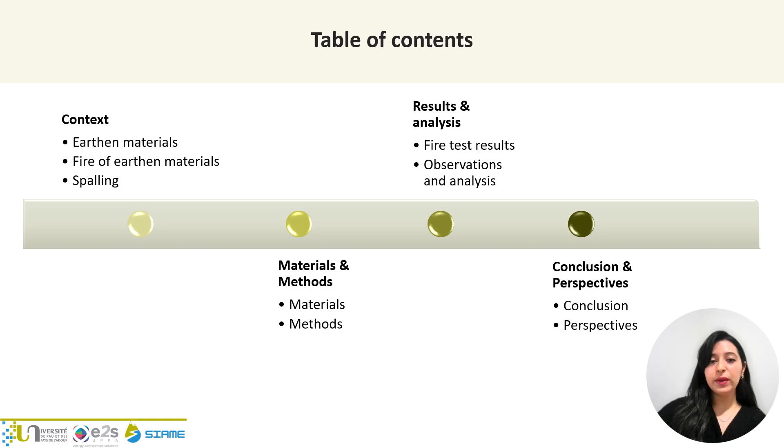In today's presentation, I will begin by setting the research context. After that, I will move on to the materials and methods. Following this, I will present the results and analysis. Finally, I will conclude. Beginning with the research context.

Historically, earthen materials have been used for thousands of years and their durability is impressive. Many historic earthen buildings have survived for centuries. Today, around 8 to 10% of the world's population still lives in earthen houses. As we all know, the construction sector is a major contributor to global CO2 emissions. Earthen materials here offer a highly sustainable solution as they require little energy for production, are recyclable, locally available, and serve as an eco-friendly alternative to fired bricks and conventional concrete. Their application is also highly adaptable, as almost any clay-containing soil can be used for construction. Earthen walls provide excellent thermal regulation due to their high thermal mass and inertia.

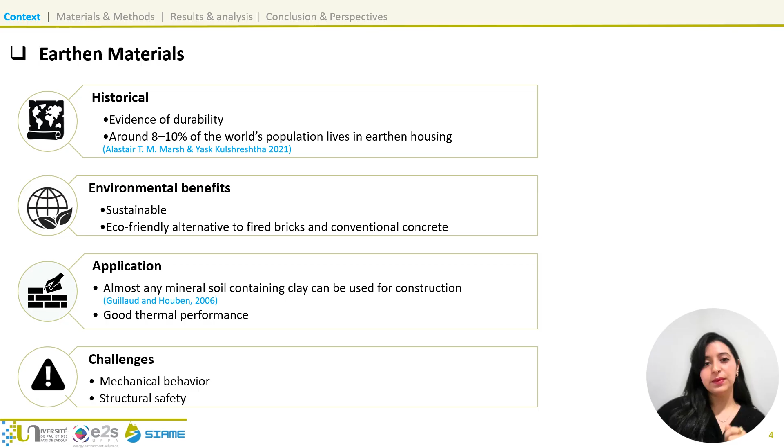Yet, challenges remain. Their mechanical strength is lower than cement-based materials, and the structural safety of load-bearing walls under fire is still poorly understood. Understanding this interaction between fire exposure and mechanical loading is exactly the focus of our study. Despite their advantages, earthen materials face a significant knowledge gap regarding fire behavior. There are currently no established standards and studies remain scarce. In real-life conditions, walls are often subjected to loads during a fire, making it essential to analyze the performance of compressed earth bricks under combined mechanical stress and high temperature to ensure safe, sustainable construction and guide future building design.

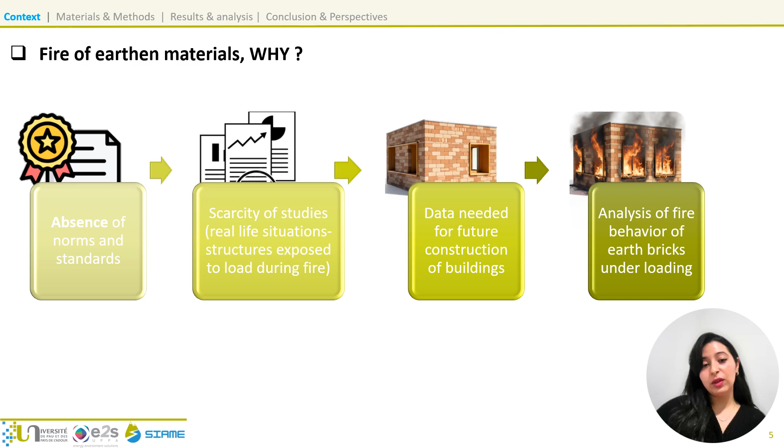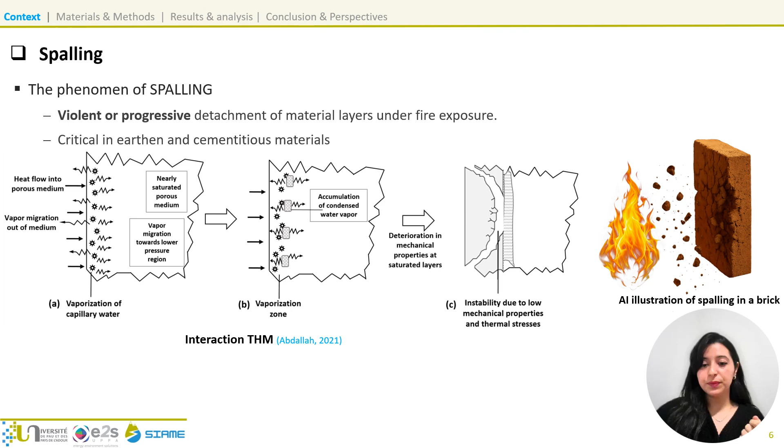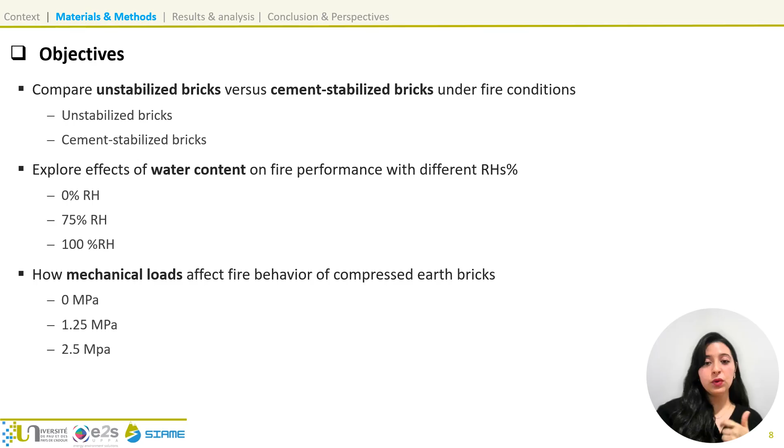Having set the context, I will now present the materials and methods used in this study. Before diving into the methodology, I would like to present the main objectives of this study. The first one is to compare the behavior of unstabilized compressed earth bricks with cement-stabilized bricks under fire conditions. The second one is to explore the effect of water content on fire performance. For this purpose, bricks were conditioned at different relative humidity levels: 0%, 75%, and 100%. Finally, we aim to investigate how mechanical loads affect the fire behavior of compressed earth bricks. Tests were conducted under three levels of applied stress: 0, 1.25, and 2.5 megapascals.

The raw materials used in this study are as follows. The soil was obtained from the Nagen brickwork factory in Toulouse, France, and it was characterized using standard Proctor compaction tests, and the optimum water content and optimum dry density are summarized in this table. For stabilization, a CEM III/A 52.5 L cement containing 35% clinker was supplied by EQIOM in Héming, France. The materials produced were designed to have a compressive strength of approximately 5 megapascals, comparable to hollow-fired bricks used in buildings.

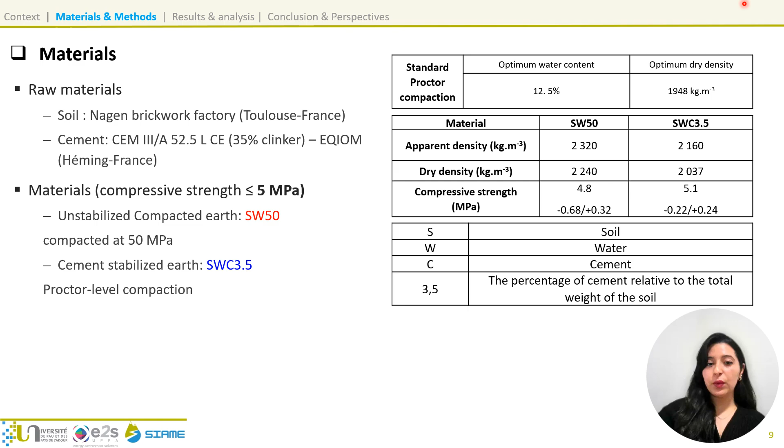Two main types of brick were investigated in this study. The first one is the unstabilized compacted earth brick, referred to as SW50, produced under a compaction pressure of 50 megapascals. The second one is the cement-stabilized earth brick, referred to as SWC 3.5, compacted at Proctor energy level with 3.5% cement relative to the total weight of the soil. In this table, we have an overview of the two brick types highlighting their apparent and dry density, and also their compressive strength in megapascals. The other table provides the legend explaining the abbreviations used: S for soil, W for water, and C for cement.

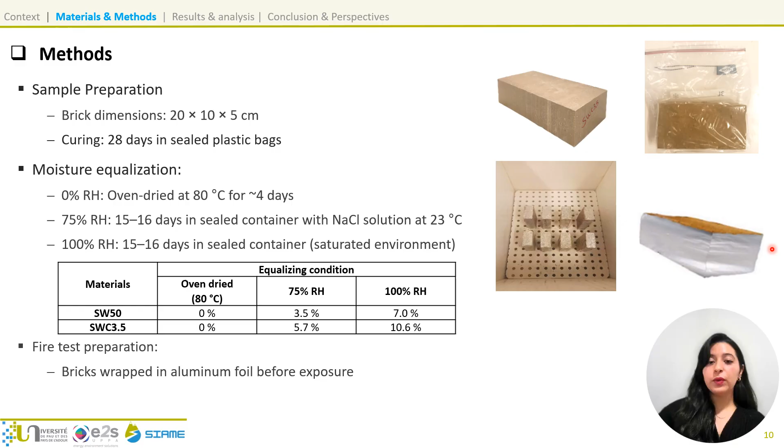Our samples were manufactured as bricks of 20 by 10 by 5 centimeters and cured for 28 days in sealed plastic bags. Moisture equalization was then performed under controlled conditions: 0% relative humidity by oven drying at 80 degrees Celsius for 4 days, 75% relative humidity in sealed containers with a sodium chloride solution at 23 degrees Celsius, and 100% relative humidity in saturated conditions, both for 15 to 16 days. The corresponding water contents for each condition are summarized in this table. As expected, higher relative humidity leads to higher water content, and cement-stabilized bricks retain more water compared to unstabilized ones. Before the fire test, all bricks were wrapped in aluminum foil to ensure uniaxial heat and moisture transfer.

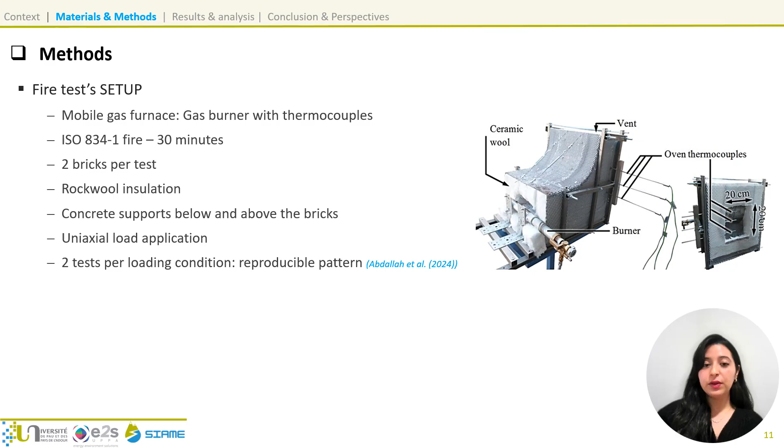Each test involved two bricks placed between concrete supports with rock wool insulation on the sides to reproduce uniaxial heat and water transfer, similar to what happens in real walls. A uniaxial load was applied during heating to simulate structural conditions.

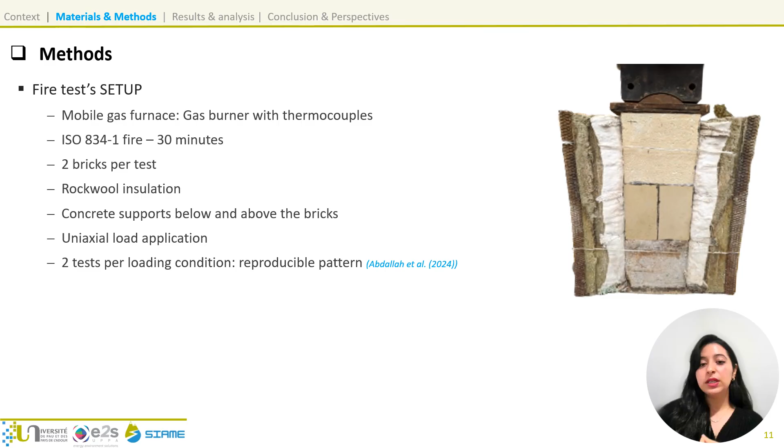As demonstrated by Abdallah 2024, two tests give a reproducible pattern, which is why we performed two tests per loading condition. And here we have a video of when the test was performed. Here we can clearly see the fire from the gas burner.

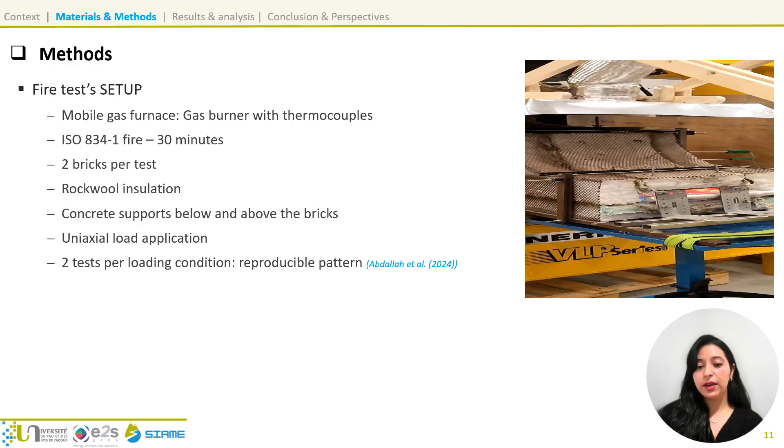What clearly emerges from this result is that the 75% relative humidity condition is the most unfavorable one, as it's the only case where instabilities occurred. By contrast, under both 0% and 100% relative humidity, the two types of brick showed consistent resistance across all loading levels.

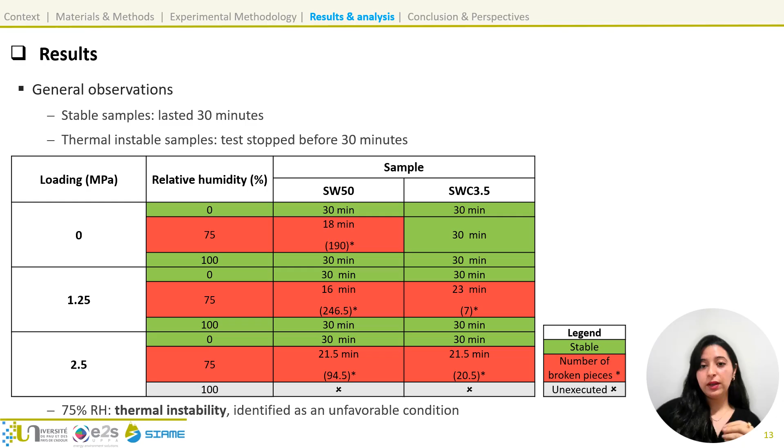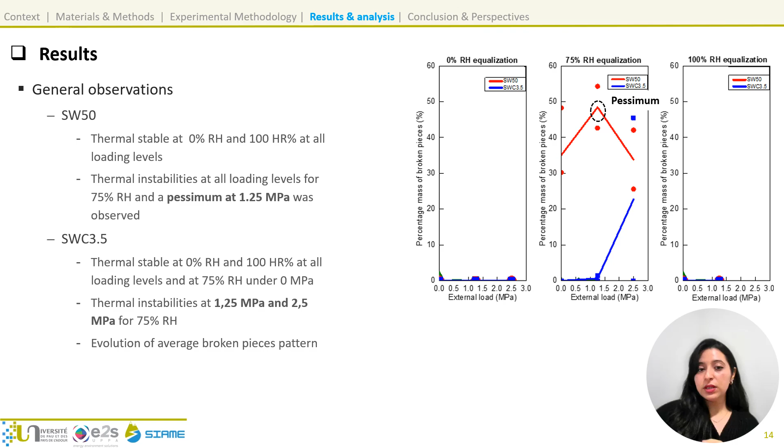For SWC 3.5, the cement-stabilized brick, stability was maintained at 0 and 100% relative humidity for all loads, and also at 75% relative humidity under zero load. However, at higher loads, 1.25 and 2.5 megapascals, instabilities were observed.

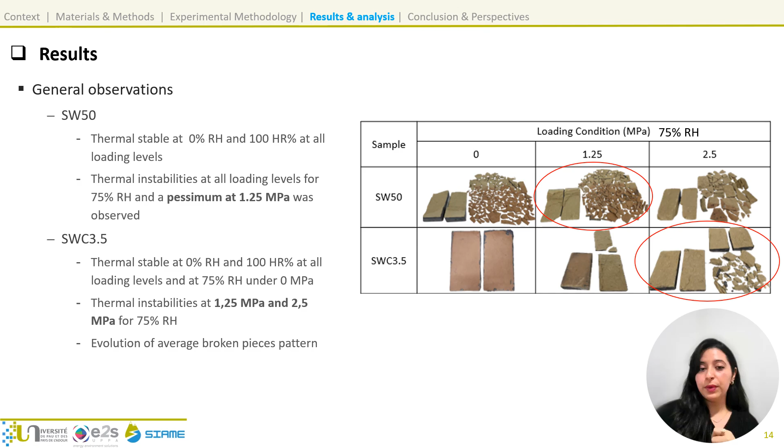As shown in this photo, at 75% relative humidity, spalling is much more severe in SW50 than in SWC 3.5. Moreover, for SW50, fragmentation is higher at 1.25 megapascals than at 2.5 megapascals, which is the maximum effect. Whereas for SWC 3.5, the opposite trend occurs, with more broken pieces at 2.5 megapascals.

Now we will analyze the behavior of both brick types. For SW50 at 0 megapascals, the brick shows high sensitivity to water content, with instabilities occurring at 75% relative humidity. At 1.25 megapascals, thermal instabilities are again observed with a pronounced sensitivity to 75% relative humidity.

Here, a maximum is identified where the closure of cracks perpendicular to the load and heated face leads to a buildup of pore pressure. At 2.5 megapascals, sensitivity to water content remains high, but the opening of cracks parallel to the loading direction enhances permeability, releasing pore water and reducing pore pressure, which minimizes the spalling.

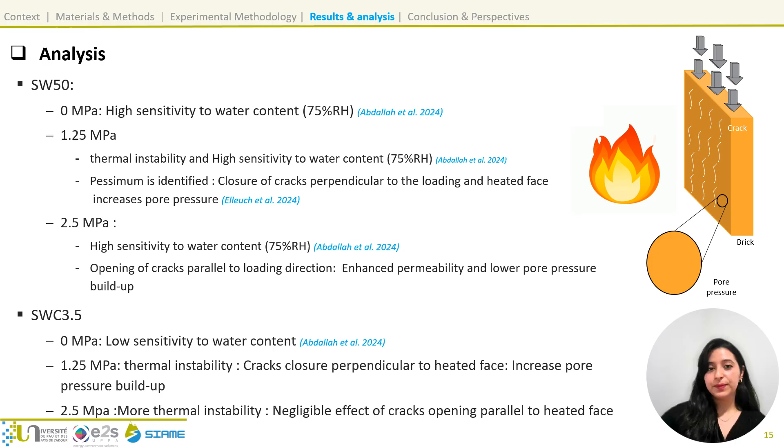Finally, based on these results, I will conclude with key findings and share some perspectives for future research. To conclude, our study gives a comprehensive idea of how fire affects compressed earth bricks under different moisture and load conditions. First, comparing the two brick types, we see that unstabilized earthen bricks are more sensitive and show greater thermal instability than cement-stabilized bricks, regardless of the applied load.

Second, regarding water content, 75% relative humidity stands out as the most unfavorable condition for both brick types. And third, looking at the influence of mechanical loads, for the unstabilized brick intermediate loading at 1.25 megapascals closes cracks perpendicular to the heated face, which amplifies thermal instability. When the load exceeds this value, cracks parallel to the heated face open, relieving pore pressure. But for cement-stabilized bricks, thermal instability grows proportionally with increasing load.

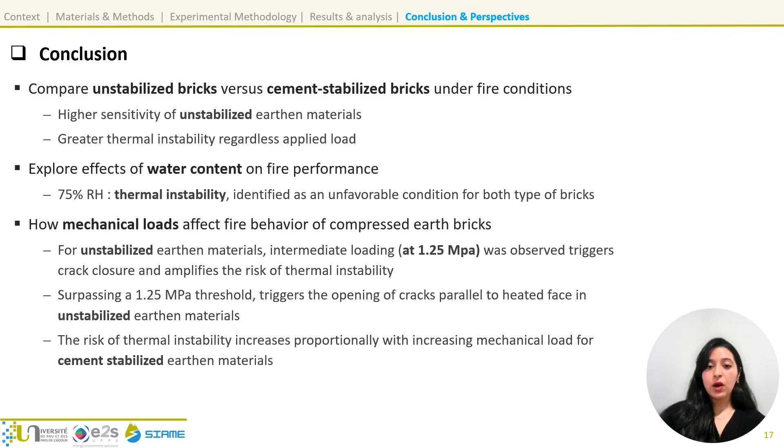Overall, these findings highlight the critical interplay of water content, relative humidity, and mechanical stress on the fire behavior of compressed earth bricks. To further investigate the fire behavior of these bricks under mechanical loads, we plan to conduct additional tests.

For the unstabilized compressed earth brick, we will examine external loads ranging from 0.5 to 1.25 megapascals to identify the onset of a pessimum effect. For the cement-stabilized brick, SWC 3.5, higher applied loads will be tested to check whether a critical pessimum exists for stabilized samples.

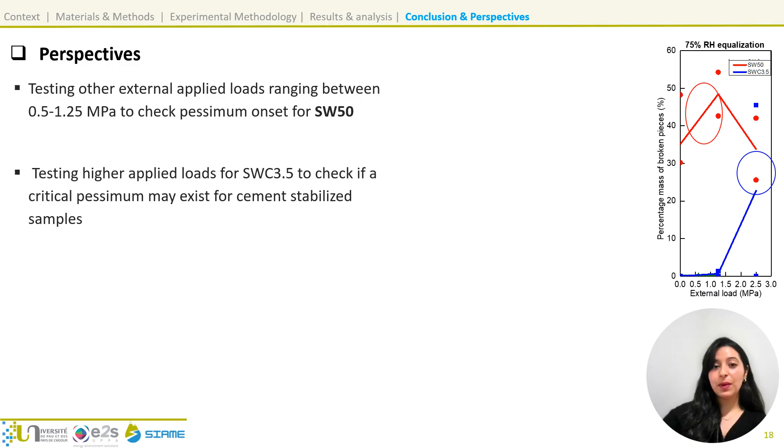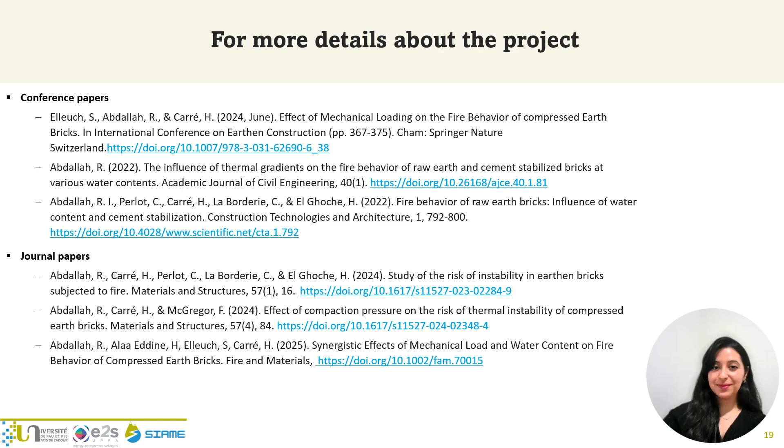So if you are interested in further details, these articles offer a comprehensive overview of the methodology and key findings of our project. This marks the end of my presentation.